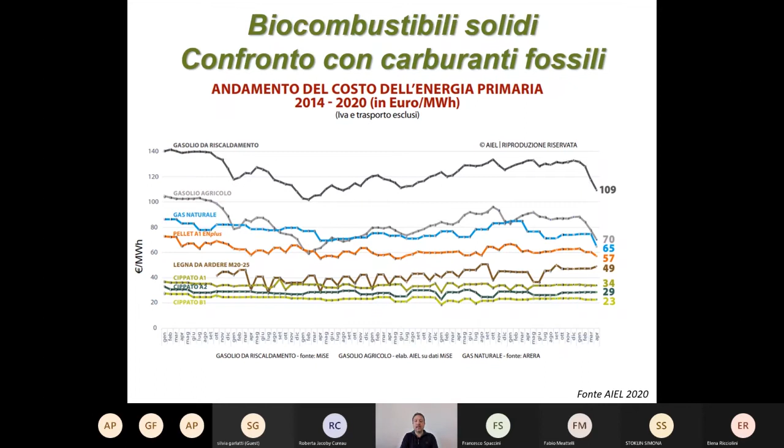And this is the main topic we talk about today. So what are the main characteristics of biomass we need to know to work with biomass. I mean, of course, make research, make also some design activities, for example. So if you work with biomass, you should know some characteristics, chemical and physical characteristics, and this is the topic of the first part of today's lesson.

And we start with a very elementary picture, but it's the easiest way to start to talk about some characteristics. When we talk about biomass, you see a piece of wood, but of course you can think about every kind of biomass we saw in the previous lesson. Every biomass consists of three main parts.

Water. We have water quantity in biomass. It's a very variable element, but present in every kind of biomass, and we need to consider a unit system and something like methodology to evaluate the water content, or we can also call it humidity or moisture. Okay, this is the methodology, and we will see the methodology to measure moisture. So water, and organic matter.

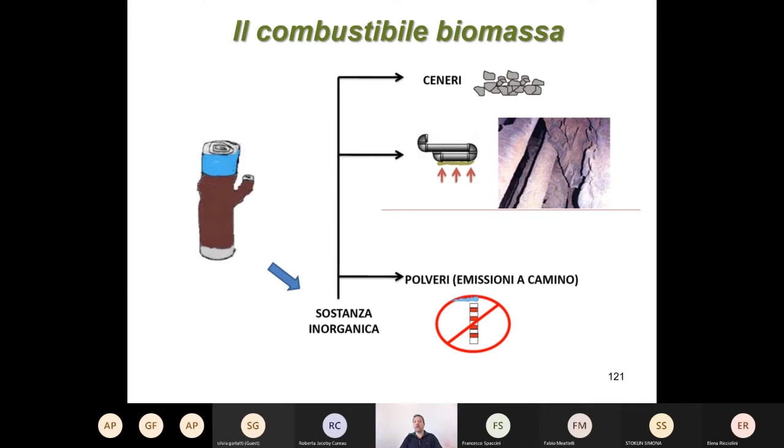Another way to see these three main parts is shown in this picture: water, ashes, and organic fraction. In general, we hope that the main part of biomass is organic fraction, since we need this part for our energy processes, but water could also have a very high percentage in biomass.

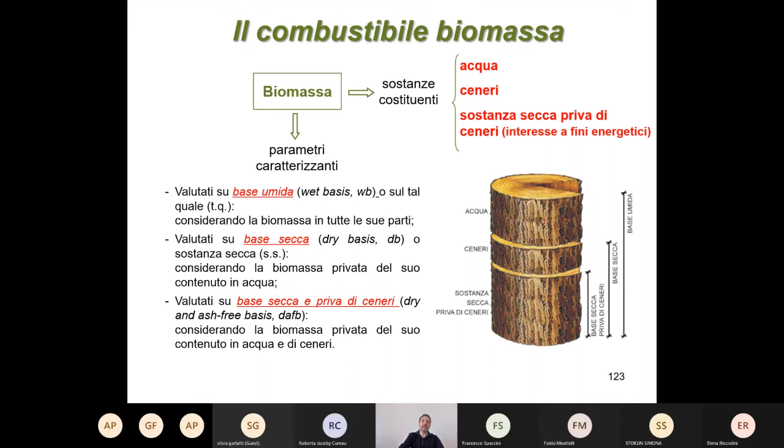Usually this parameter is called the stereo cubic meter. It's a particular unit we use to indicate how much biomass can stay in a cubic meter. For example, in one cubic meter we can have up to 600 kilograms of wood.

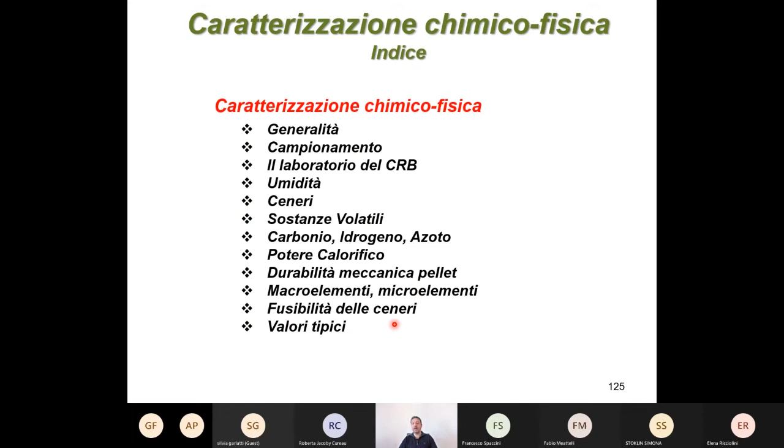These are the analysis machines we have in the CRB laboratory. We have a mill for the preparation of biomass samples. We have a thermogravimetric analyzer to measure moisture, ashes, and volatile matters. We have a calorimeter for measuring heating value, low and high heating value. We have an analyzer for carbon, hydrogen, and nitrogen elements, the pellet durability tester, and several chromatographs, ionic or liquid chromatographs, to analyze the content of chlorine, sulfur, and other elements and compounds interesting for some bioenergy pathways.

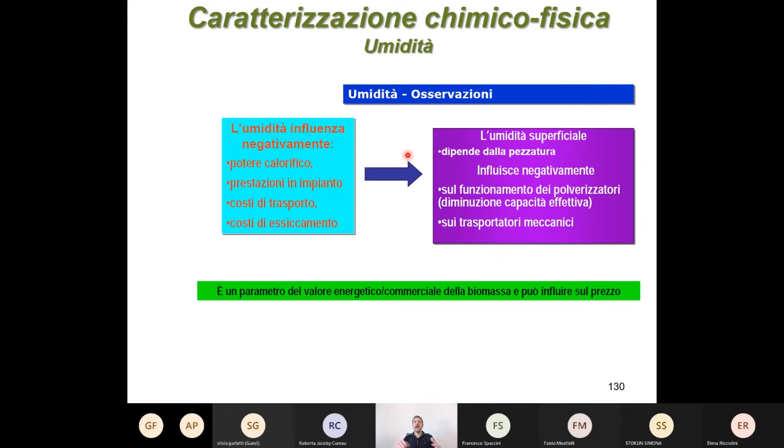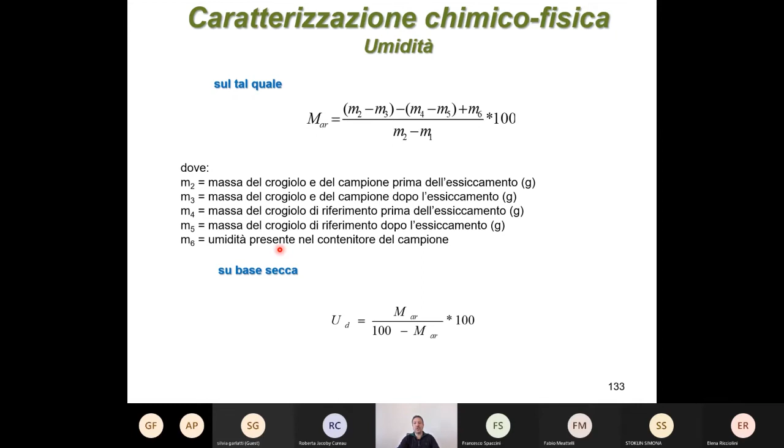I'll go very quickly, so I won't read everything about measuring humidity. Starting from the thermogravimetric analyzer, it's like a balance. We measure the weight, put biomass in with an increase in temperature, and when we're over 100 degrees, for example 105 or 110 degrees, we have water evaporation. We measure the difference in weight and automatically know the water content in the biomass. Then we make a sort of combustion and weigh the biomass after the high temperature combustion. We measure the ashes content, and with the difference we can also define the volatile substance content. I'll jump the equations to know these parameters, but it's a simple process where we use different temperatures to measure the different parts we can define in the system.

Here are some pictures, but of course we can have a closer look during our last lesson, the fourth lesson, which we will have directly in the Biomass Research Center laboratories.

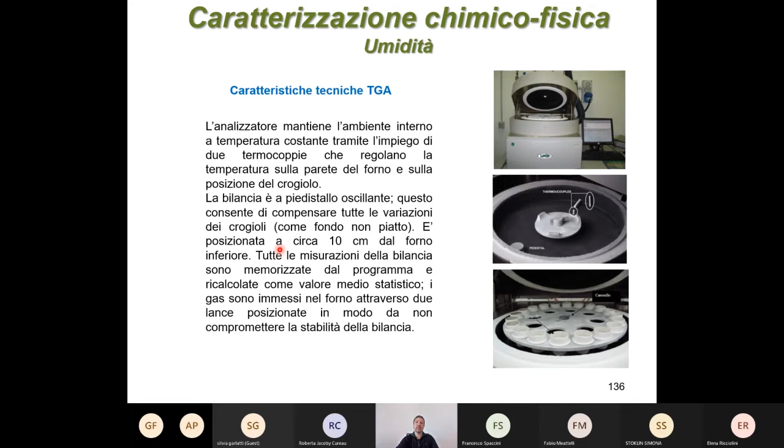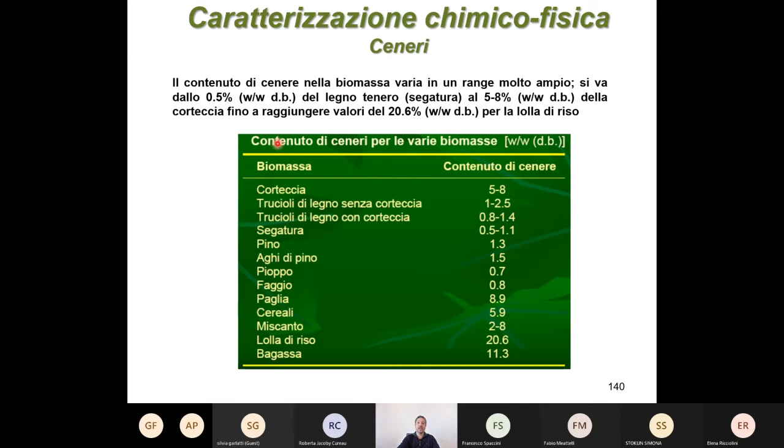I'll go very quickly without deepening into the process you have to do to use this machine, just to show you the result of the analyzer.

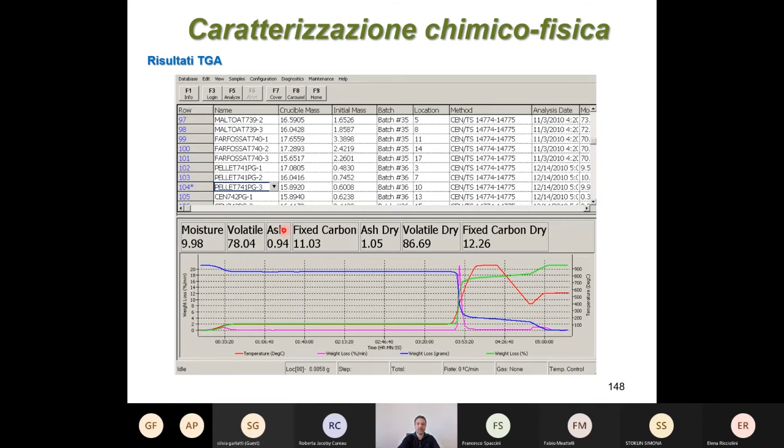Very quickly, another instrument you can use to measure some elements: carbon, hydrogen, and nitrogen. These are the three main elements you find in biomass. So the largest part of biomass consists of carbon, hydrogen, and nitrogen.

Then you can have some oxygen, for example, and of course sulfur, chlorine, and metals, but these are in a very smaller percentage. You have a system that burns the biomass and reads the generated gases from biomass, and so the system evaluates the nitrogen, carbon, and hydrogen content in the biomass.

Another, maybe the most important parameter is the energy content: the high heating value, HHV in English, and the low heating value, LHV in English. These are two ways to evaluate the energy content of biomass, and the difference is connected to moisture.

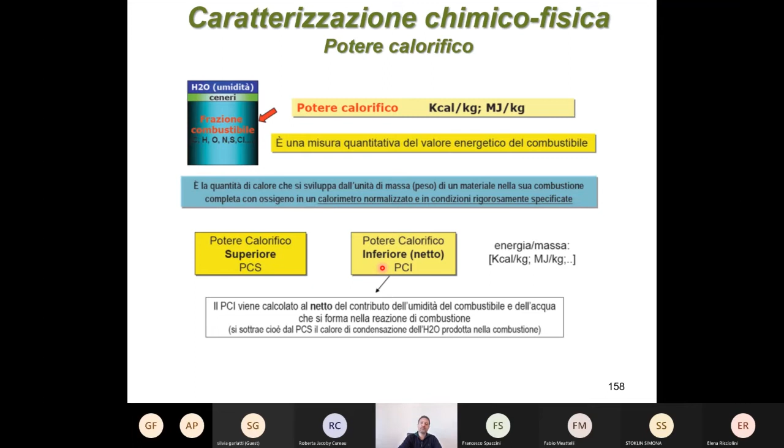We have a system called the Mahler bomb. You put some biomass inside this system, which is full of oxygen, and there is a part where there is some water, covered by a layer of water. Then there is a combustion here when the process starts, so there is something like an explosion. The biomass burns, produces heat, and the water temperature increases. By evaluating this increase of temperature, we can evaluate the energy content of the biomass.

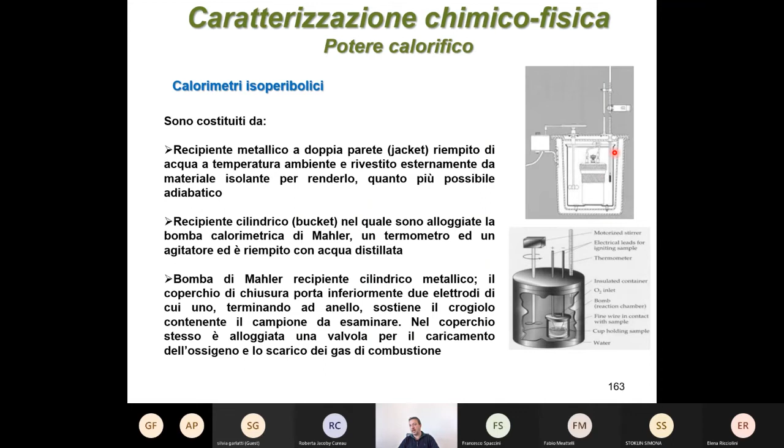So this is one way to see it. Here there is water — this is the bomb, the Mahler bomb, and this is the part where there is water. So when the combustion, the explosion, happens here, this system exchanges heat with the water, which increases its temperature, and the thermometer can evaluate this increase and show you the energy content, following this very simple equation. This is another way to evaluate it, taking into consideration some parameters inside the instrument.

Here is some information about the low heating content of some biofuels and also some fossil fuels. You can see, for example, wood has a low heating value between 2,500 and 4,500 kilocalories per kilogram. You can also find the equivalence with other unit measures — for example, wood has an energy content, low heating value, between 3 and 5 kilowatt hours per kilogram.

Compared to fossil fuels, this energy content is lower. For example, diesel has an energy content of approximately 10,000 kilocalories per kilogram. The same for gasoline. Methane has a low heating value of approximately 8,000 kilocalories per kilogram, or kilocalories per cubic meter in this case.

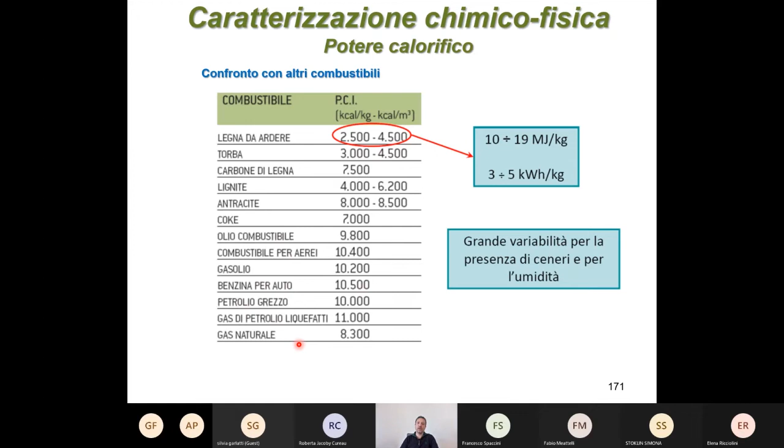For chlorine and sulfur content, we use chromatography. I don't have time to speak about chromatography systems in detail, but just know that it's a very important part of the chemical analysis world, allowing measurement of a very large family of elements and components.

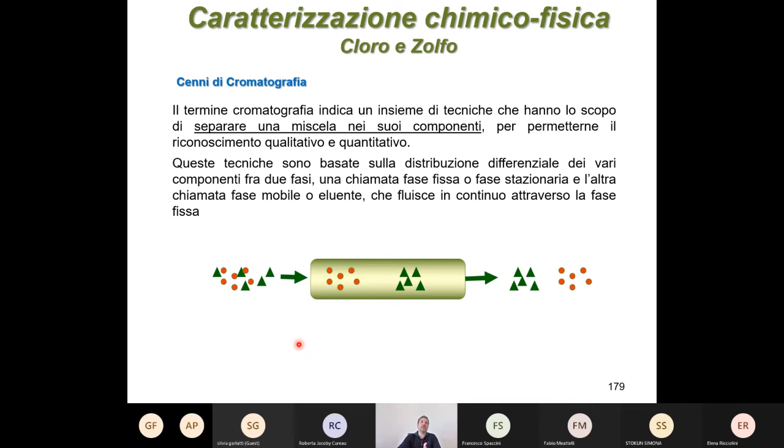We can have liquid chromatography, ionic chromatography, based on columns where the samples move. These columns separate the sample into its main components, and by evaluating the time every component needs to reach the end of the system, you can evaluate what the component is and what its content is in percentage, for example.

So in one minute I talked about chromatography, but of course we don't have time to go deeper. Here is the sense of these analysis systems: if a sample consists of two compounds, two elements, as it moves along the column, these two components have different affinities with the substances inside the column, so they move at different speeds and arrive at the end of the column at different times — and you can see this in the chromatogram.

Also, the pellet durability is another parameter we use to know how much resistance the pellet has to the transport step. It's important because pellets are small cylinders where sawdust is pressed, and when you move the pellet during transport, it can break down again into sawdust, which is not useful for your boiler or fireplace. So durability says how much of the pellet remains in good composition. For example, 97% means that 3% could be lost because it turns back into sawdust.

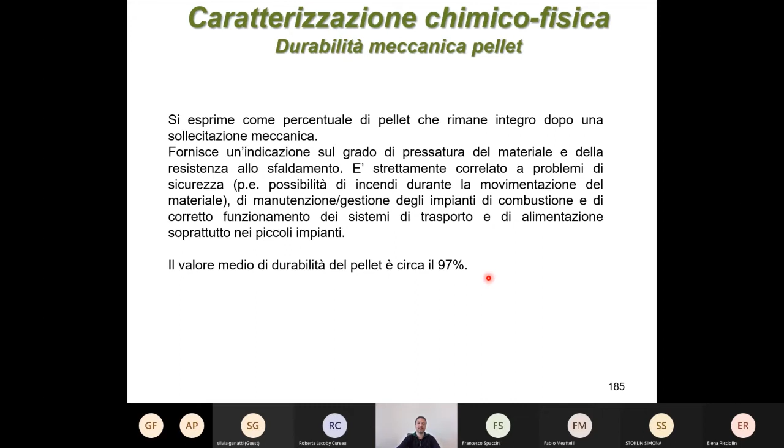I complete this topic, the chemical-physical characterization, by having a look at two very different biomasses, just to appreciate how much these parameters can change in a biomass compared to another.

For example, we will compare wine prunings, some lignocellulosic biomass from the pruning of viticulture for wine production, and here you can see a picture, and we will compare it with pellet obtained from sawdust from forestry maintenance. These are different biomasses, but not so different, because you should mind that we can also have manures, for example, or very liquid biomass like vegetable oil. So we are comparing two different biomasses, but not so different, and you can see how much some parameters change.

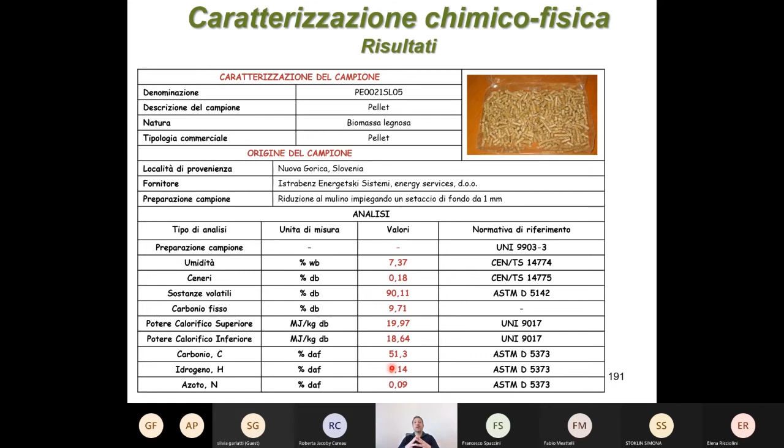And why do we have to know these parameters? Because, and this is probably the most important slide we will talk about, it's so important to know the composition of biomass because this composition gives me the information I need to make a choice of what process I can perform with this kind of biomass. And so this brings me to introduce the next topic of this lecture, which is bioenergy conversion processes. We talked about biomass typologies, we talked about how to transform biomass into biofuel.

Now we can talk about how, from a biomass, from a biofuel, I can move through a process toward a final bioproduct. And this final bioproduct could be energy, of course, which is a very important part of this world. Through a particular process, I can produce energy, electricity, heat, and cool energy. But also I can produce, for example, biofuels, biodiesel, biomethane, bioethanol in substitution of gasoline, biohydrogen, which is a quite new energy vector we are exploring in research and also in some development systems, or for example bioplastics, biolubricant, and so on. I can continue all morning showing you final bioproducts you can obtain.

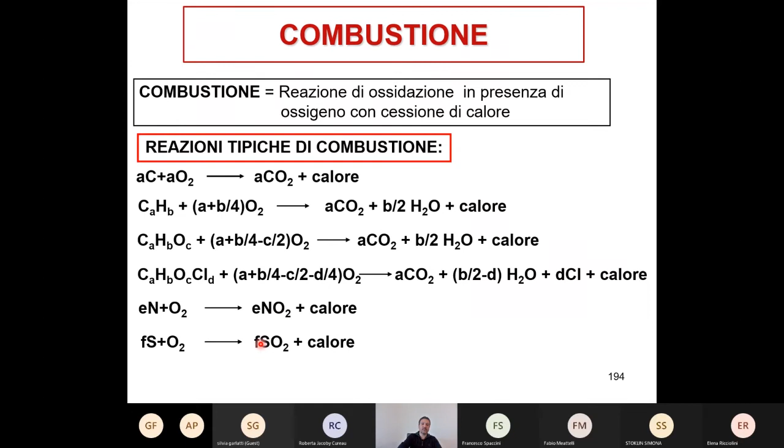Another important thing you should know when you talk about biomass combustion is that, comparing to methane, we have a biofuel with a volume. Think about wood, for example, or pellet or chips. We have a biofuel with a volume, so in general we have three phases during biomass combustion.

A first drying phase where we are at more than 100 degrees, and water inside the biomass starts to evaporate. This is the first part. We have a second part, which is a sort of pyrolysis. We are talking about combustion, but we have a sort of pyrolysis, because when the temperatures become very, very high, 300, 400, 500 degrees, we have this situation where inside the biomass we have very high temperature, but there is no oxygen, because oxygen is around the biomass.

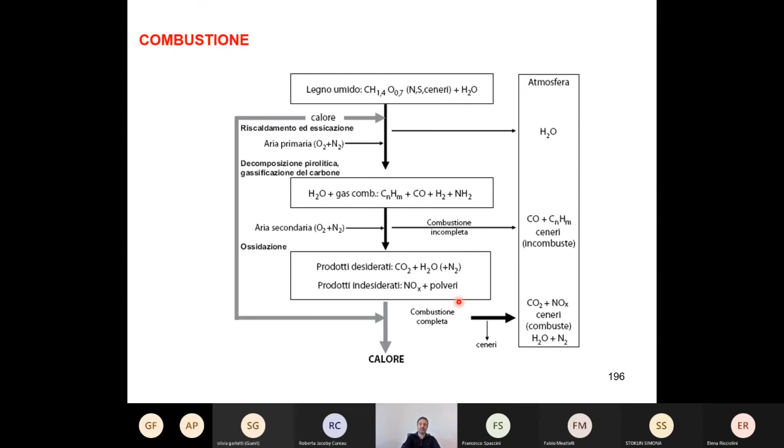Okay, now as usual I move towards interesting combustion systems. So how can we use these combustion processes? What is the combustion system we can use? Let's see, I'll go quickly.

Okay, sorry, just a stop to what I was saying, to have a look at the biofuels. I don't know if I showed you this picture, but just to understand what we are speaking about: this is pellet, small cylinders. These are wood chips, small pieces of wood which have a low energy content, but also a very low cost, because you can obtain them from, for example, agricultural or forestry residues. Briquettes are not so commonly used as biofuels, and of course wood, but wood is just for our houses.

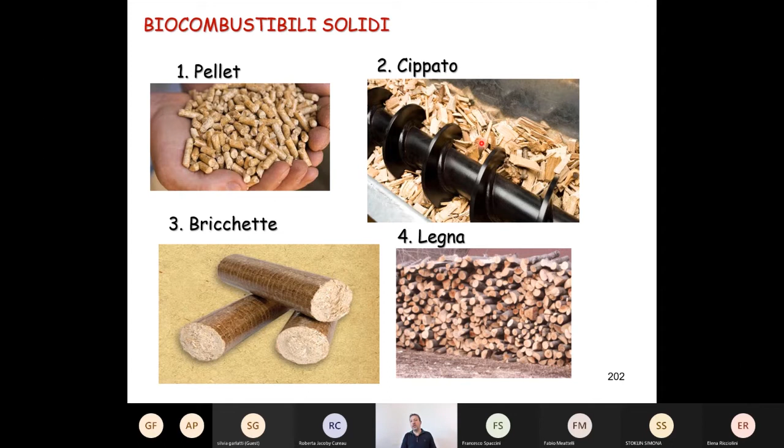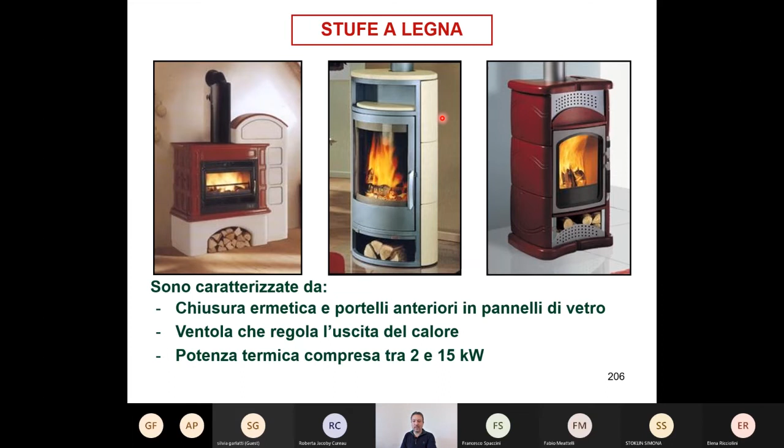There is no industrial use of wood. When we talk about industrial use of bioenergy, we talk in general only about wood chips. And so, biomass energy conversion systems start from your fireplace, the simplest system for producing energy from biomass. But of course, we quickly move towards more interesting biomass systems. You can also see some other kinds of stoves, wood stoves, pellet stoves, and now we can move to boiler systems, biomass systems that produce heat for our heating distribution system.

In general, the boiler produces heat that is exchanged with water, and so you obtain hot water that is used, for example, in your terminals to produce heat for your rooms, also for your shower, and so on.

Here you can see another typical way of biomass combustion. In general, you have a first combustion where you have the combustion of wood, and then a secondary combustion here where gases produced from the first combustion are burnt, because in the process you also produce some gaseous biofuels, and you have to burn them to maximize the energy production.

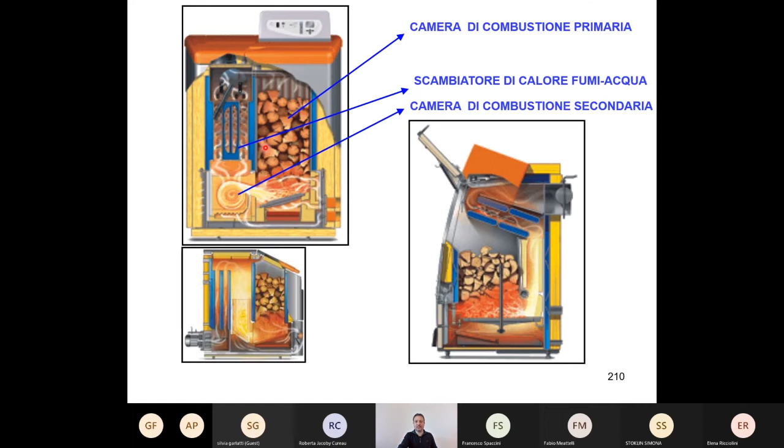Just very quickly to zoom only to important information. These pictures let me speak about another topic we just introduced. One of the main differences between, for example, methane boilers and biomass boilers is the store system. We just introduced this theme.

You usually don't have to think about the gas the boiler needs, because you have a pipeline that is connected to your methane boiler, and if Russia doesn't close the pipe, we should have all the gas available into our boiler.

If you have a biomass boiler, you also have to think about the biomass supply to the boiler, and also the biomass store for the boiler. Otherwise, you have to stay all day to charge the biomass.

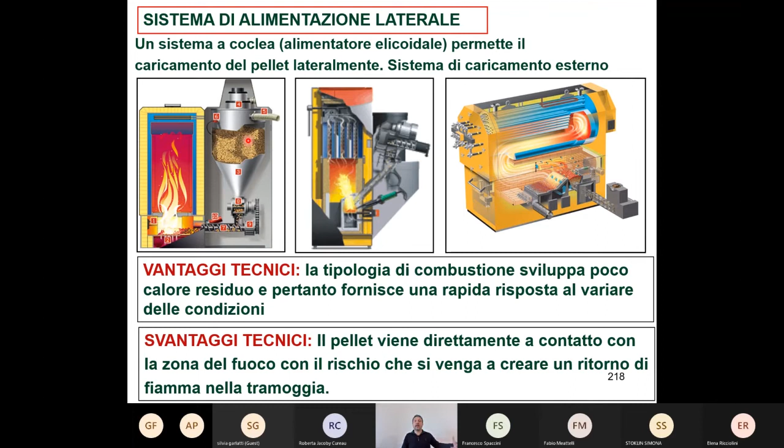So if you want to use a wood chips boiler, you need a very large store, and so it's not convenient in small houses. We're talking about big houses where this kind of space for the boiler and also for the store is available.

So we have the possibility to have an automatic system, but of course you have to supply this store every 2 months, 3 months, or every year. It depends on the size, on the dimension of the store.

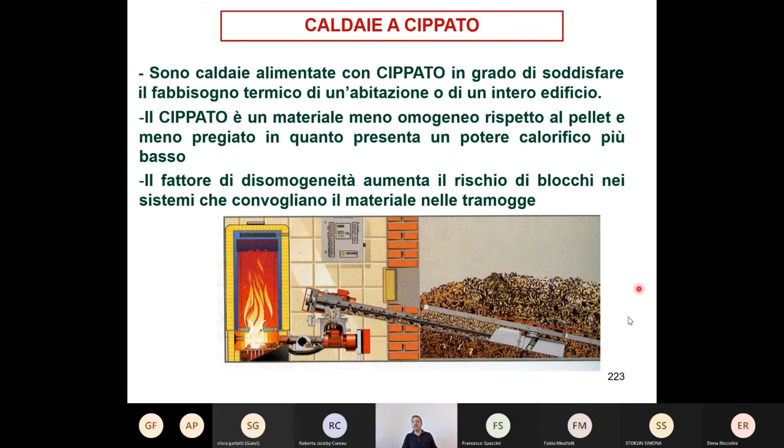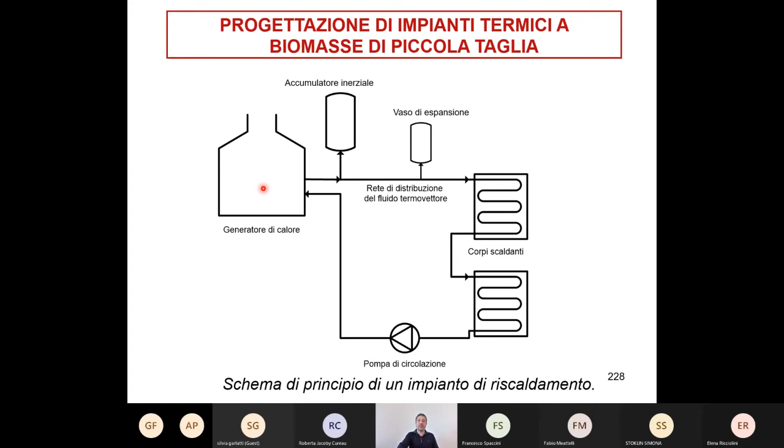Yes, I go very quickly just to see some pictures about wood stores, or for example, in general, if I have more time.

In the course we make also some examples of the designing, the evaluation of the volume of a store for pellet, for wood chips, and so on.

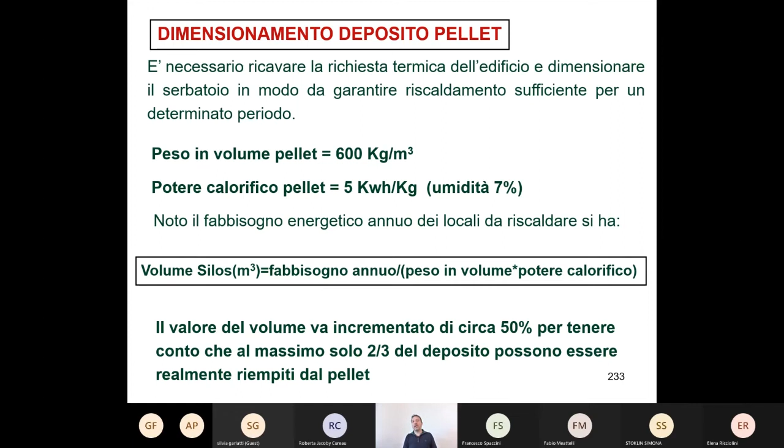But of course we don't have time now, because otherwise we have to stop the course with these exercises. So I go very quickly here.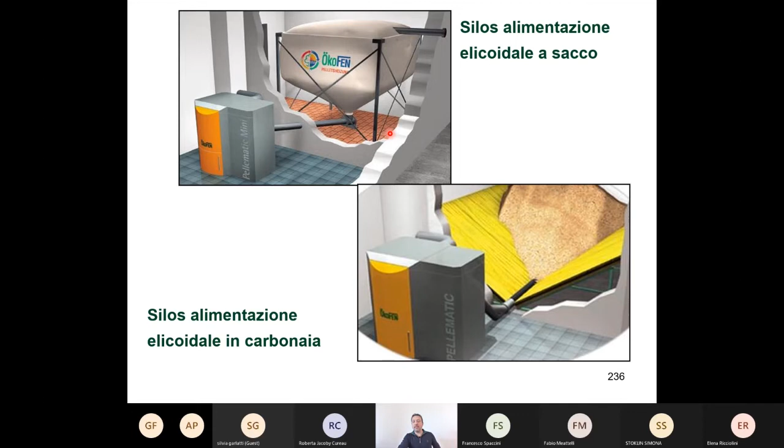Some moving systems. We can use also some bags for pellet store. Of course, some stores for wood chips too.

A lot of possibility. Of course, you can have a specific building in this case for the energy system. So we are not speaking about your or my house.

But if we speak about a very important house, or for example other users like industrial areas or commercial areas, or a hospital, for example, so a very large building, we can think about this.

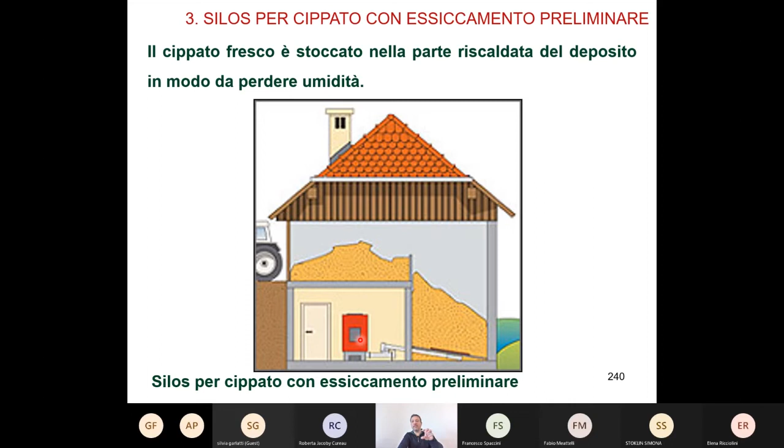This building for the boiler and for the store, so a lot of possibilities. This is the easier part, because you can create a store.

Underground, and also use the underground of your building, and you can easily charge the store, and you don't need so much space.

To have these systems working. Okay. Or another possibility is this one, a container.

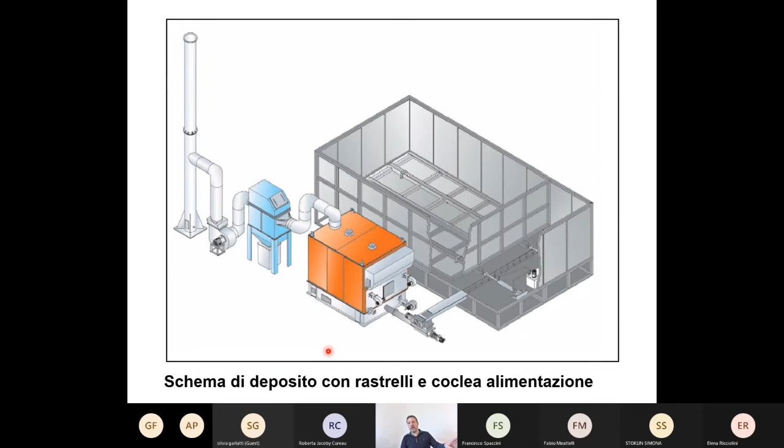There are many possibilities. Of course, as I said, we are moving towards bigger plants. Here some storing and moving systems.

I just told you about the coclea, to move wood chips and to charge it into a boiler. Some kinds of other systems to move the biomass inside a store, a conveyor belt, for example, or some racks.

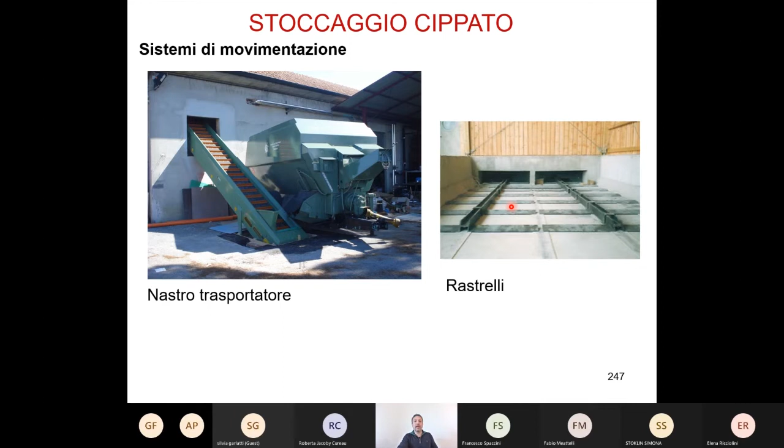Moving racks. Okay, other kinds of moving systems to move biomass. And of course we have reached very big sizes.

Here then there is an automatized store for the systems, and of course the production of very large quantities of heat.

The combustion phases are the same: drying, pyrolysis, and oxidation and combustion, both in your fireplace and in a big plant.

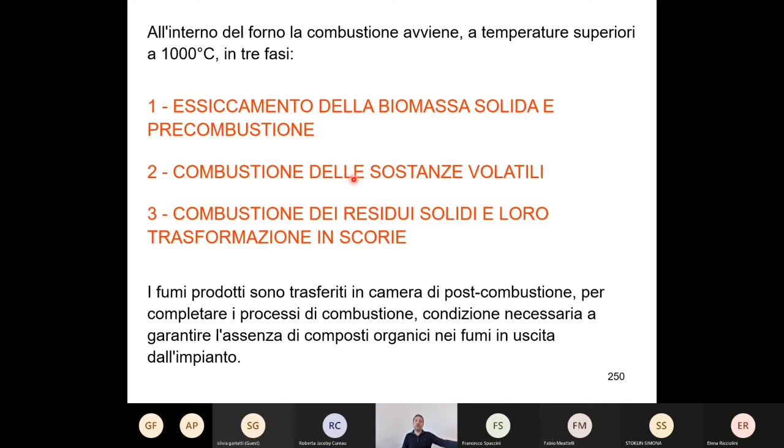Okay. Yes, these are other possibilities for these big plants, with a moving grate, with a particular system.

Other pictures of boilers with the heat exchanger to transfer heat from exhausted gas to water, for example.

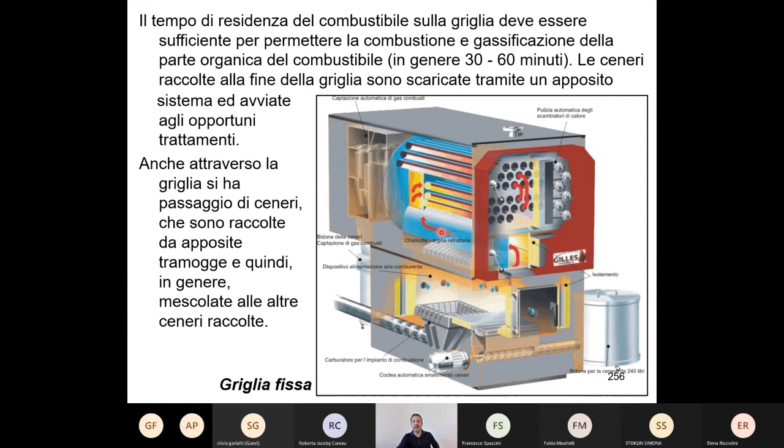So a lot of technological systems to use biomass in these energy production systems.

Okay, I go very quickly to this other very important concept.

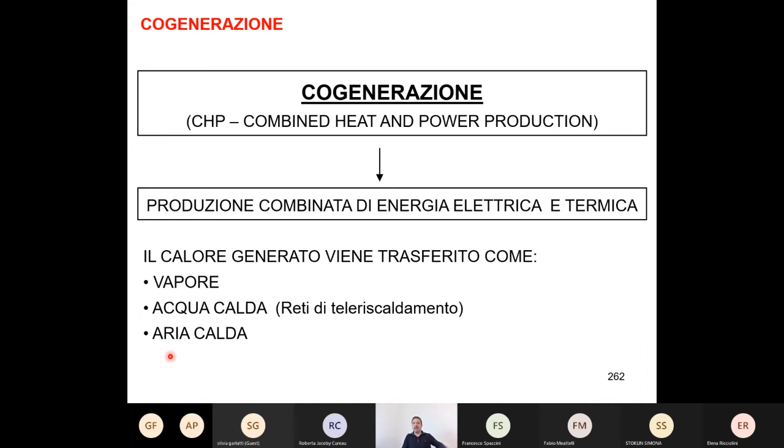We are speaking about very large plants, up to district heating. So the distribution of heat into towns, into industrial areas, into commercial areas. So we are talking about district heating, teleriscaldamento.

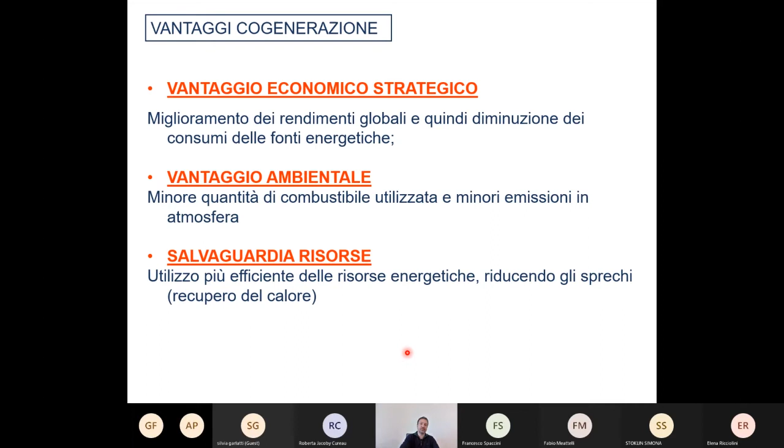We also have to consider the weakness of cogeneration. You can use combined heat and electricity production only if you have the possibility to use it in the neighboring area. Electricity could be used very far from the production point, because we have a distribution grid that covers all over the world, but you don't have the possibility to transport heat in a long way. So there is local availability for its use. This is a weakness, but it's not a weakness if you realize this kind of plant near heat and cool users.

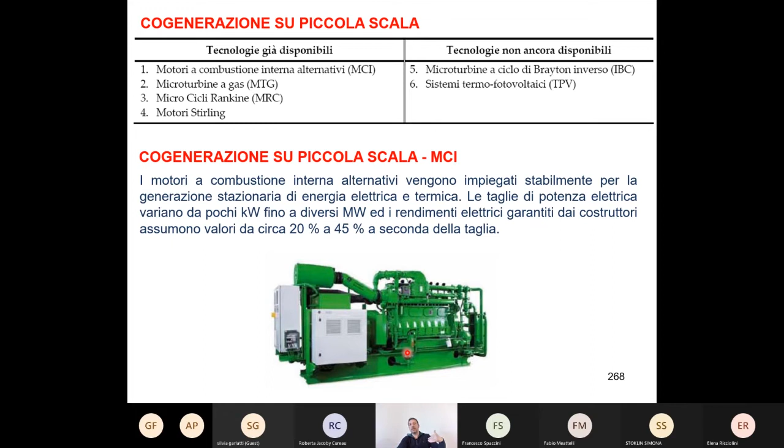I will not speak in detail about engines, turbines, Rankine cycle, diesel or gasoline cycle, because you should already have this information from your university studies. Just to show you where the combustion process, also for biomass, can reach: we can use turbines, diesel engines fed by biodiesel, gas turbines fed by biomethane. So combustion can reach a lot of potential applications. Cogeneration can also be used at small size, for local buildings or local areas.

The progress of technology allows us to decrease the size of these cogeneration systems. Some information about these systems.

Just a mention of the organic Rankine cycle, which is a particular system used quite often also in biomass systems. It's quite different from the traditional Rankine cycle. In the traditional Rankine cycle, the thermofluidodynamic fluid is water - you studied a Rankine cycle with water and its evaporation to produce energy. The organic Rankine cycle uses an organic fluid instead, so it's different. The system is the same, because we have an evaporator, a generator, a condenser, and a turbine, but the fluid changes, and so the temperature, pressure, and other parameters change. I don't want to go too deep into this, but just to note this.

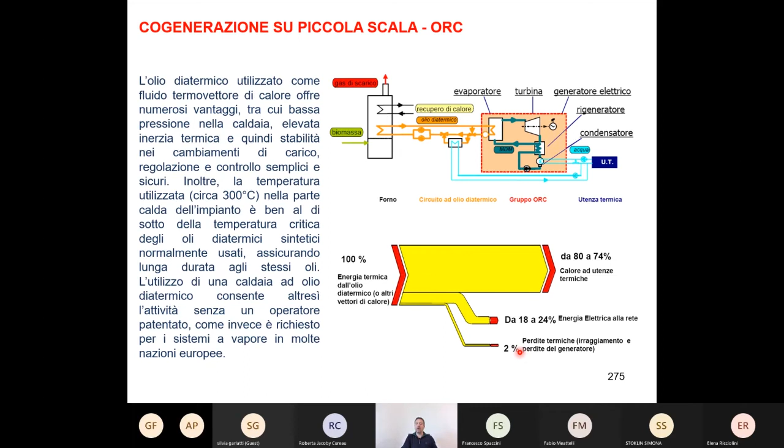It can also be used to produce cool water for cooling systems, so you can use it in summer too. District heating can also be used in summer for cooling system supply, and so the energy recovery is much higher, because you recover heat not only in winter or autumn, but also in summer.

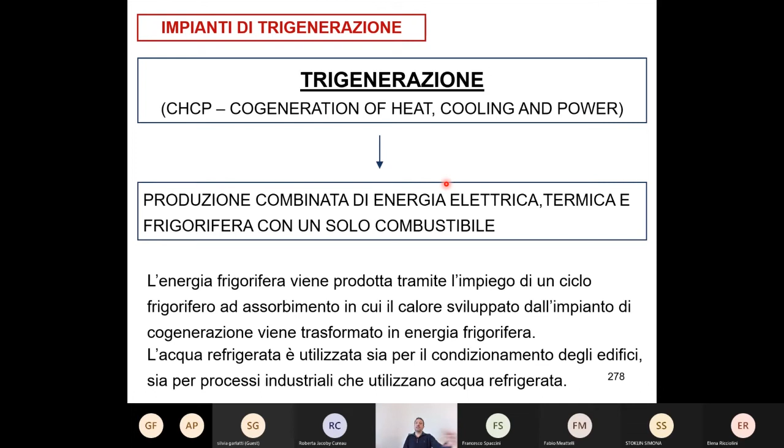And here some information about district heating.

Okay, so is it possible to make some questions? Of course, sorry, I didn't ask if anyone has a question. Of course, please, thank you so much. Could we go to page number 192? Of course. My very, very short presentation. Okay, so.

I wonder which of the technologies you showed in this slide is the most mature, and if there are existing plants currently being used. Sorry, what is the technology that is more mature?

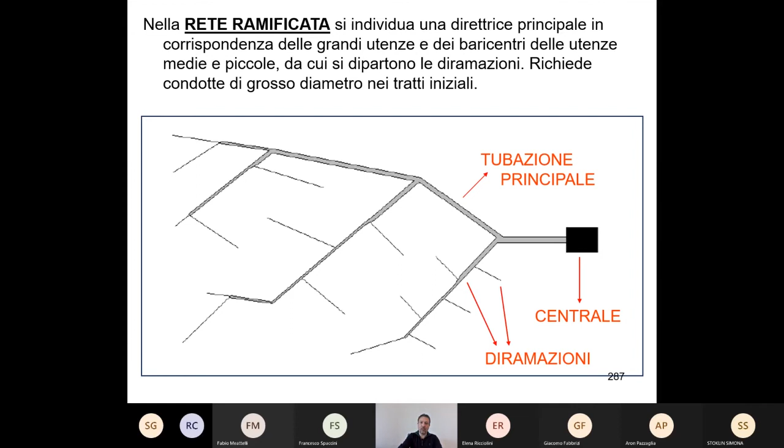So now you should see the presentation, just to show you district heating, where you have only one energy production system that produces electricity in general, and also heat, and a distribution system. Here you can see the single buildings reached with hot water, and this hot water will also be used in summer for cooling buildings. There are several possibilities for district heating, but just to know: the pipeline, which can run along 5 or 10 kilometers, must have very, very good insulation. Otherwise, if you start with 90 degrees centigrade, you reach the last user with 20 degrees centigrade, and it's not useful for heating. So you have to use very performant pipes with very big insulation systems.

And this is the pipeline you have to create to reach the single buildings. Of course, then you have to connect with the building, which in general is an existing building. So you have to reach the building and connect to the local heating system. This is a very important part, and not every house or building has the possibility to connect with district heating. So you have to design this part with great attention.

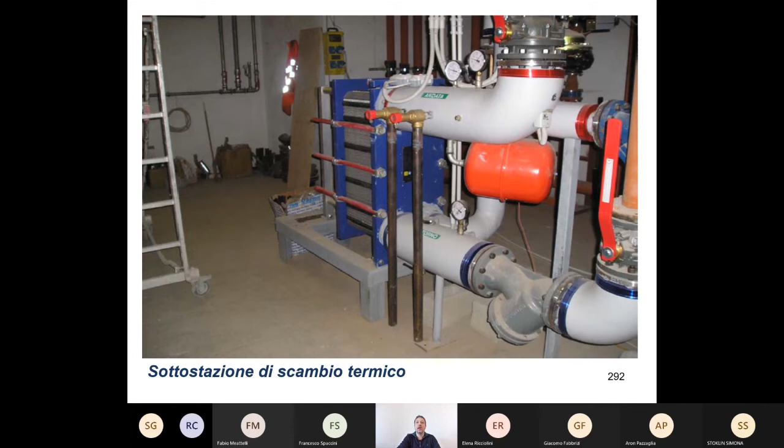Okay, a very quick zoom into gasification, just to say something more. So gasification is a sort of combustion, but with less oxygen than the stoichiometric amount needed. Small combustion needs to give the system the energy it needs, while gasification is the transformation of biomass into a syngas, into a gas. What does this syngas consist of? The main components are carbon monoxide, which is a gaseous fuel because carbon monoxide can burn to produce energy, as well as methane and hydrogen. So these are the main components of syngas, and that's the gasification goal: to obtain a gas useful in other energy conversion systems. So this is the difference from direct combustion.

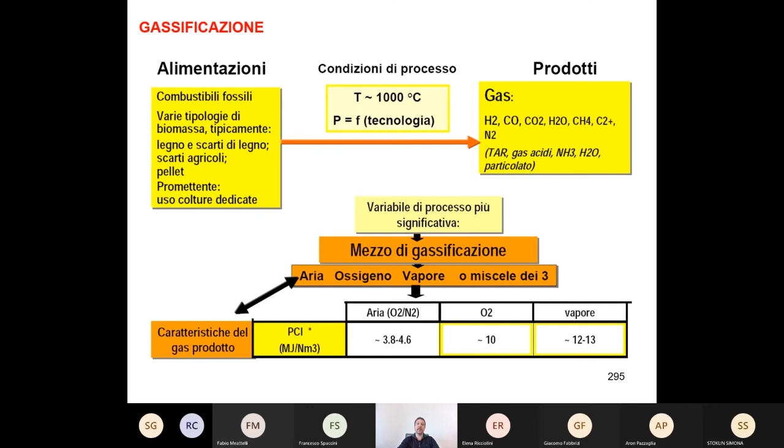The process needs some heat. This is the reason you use a part of the biomass to produce flames, to produce combustion and give energy to the process. You can use air directly, or you can use air to reach a certain oxygen percentage, or you can use directly oxygen without air, without nitrogen, only oxygen.

You can also use steam, and of course the low heating value of syngas increases. Using air, you have a syngas with a lot of nitrogen, which doesn't participate in any energy process. So you have half of the syngas as nitrogen without energy content, so the energy content is quite low. If you use oxygen or steam, you have very low presence of nitrogen, and so the low heating value increases, double compared to the air one.

So it's a difference, but of course air is not a cost, while oxygen is a cost to the system, so you have to evaluate if it's economically feasible to use oxygen.

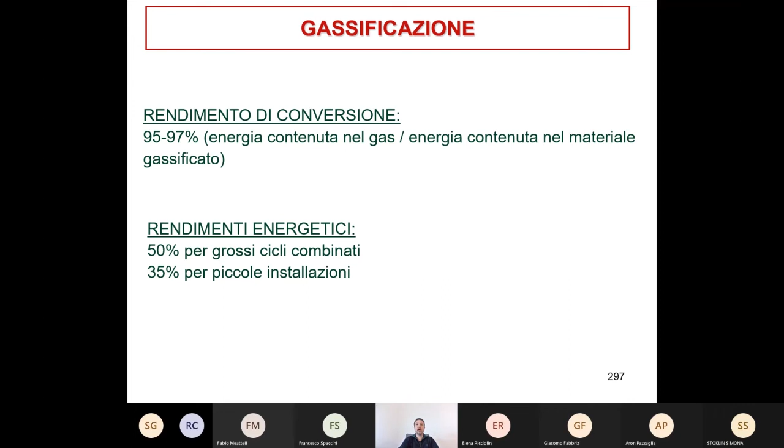As I said, I don't treat the typologies of gasificators because it's too heavy and it's not convenient to stop here. I just give you an input about the syngas treatment.

Syngas is a very complex mix of components. You need to use only the components that participate in the following combustion, so you have to eliminate the pollutants too, particularly some metals, nitrogen, tars - which is a liquid fraction that can move together with the syngas - sulfur, chlorine, and so on. There are a lot of treatment systems to obtain a pure syngas with only the components you need for combustion.

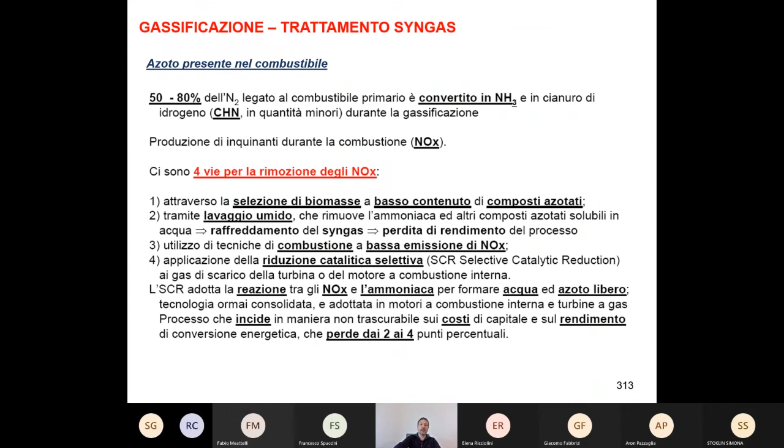You have biomass subjected to a range of temperatures, from 400 degrees centigrade to 800 degrees centigrade, without any oxygen - so in an atmosphere with 0% oxygen. With these conditions, you can transform biomass, with this high temperature, into three elements: a solid biofuel, the char; a liquid biofuel, the tar; and a gaseous biofuel, which you can call syngas or pyrogas, to distinguish it from gasification technologies.

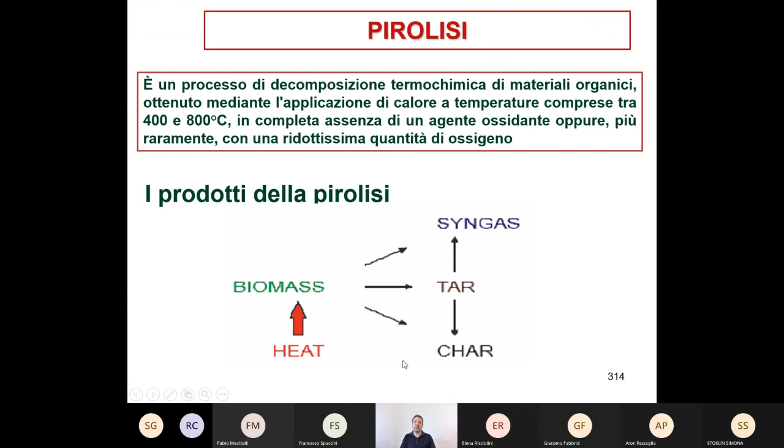To complete this part: the low heating value, which is very variable in pyrogas, from 10 to 25 megajoules per kilogram. So its content is probably higher than syngas obtained from gasification. And of course, we don't have nitrogen in the pyrogas, so the energy content increases.

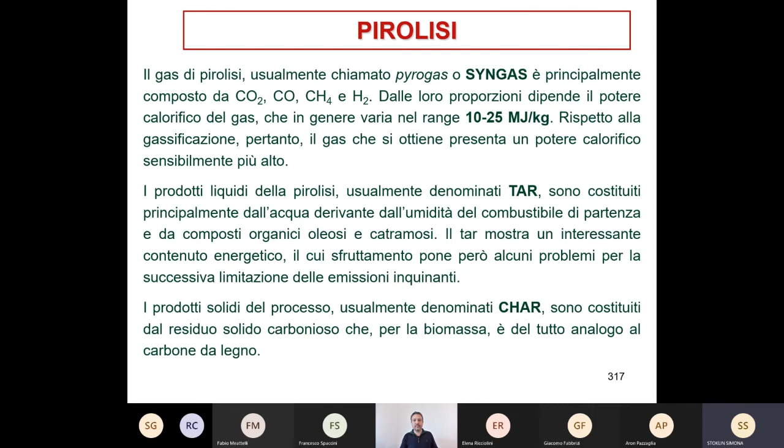As with gasification, I won't show you the pyrolyzer or pyrolysis systems. Just a final look at the emissions of thermochemical processes, another important topic you must consider when entering the bioenergy and bioproducts pathways.

When you work with thermochemical processes, you have emissions mainly in the gaseous fraction, in the exhausted gases, but also for example in the ashes, the solid residue. Comparing biomass processes with fossil fuel processes, you have these families of pollutants: nitrogen oxides, sulfur oxides, particulate matter (PM) in the exhausted gas, and VOCs, volatile organic compounds, which are very dangerous for human health.

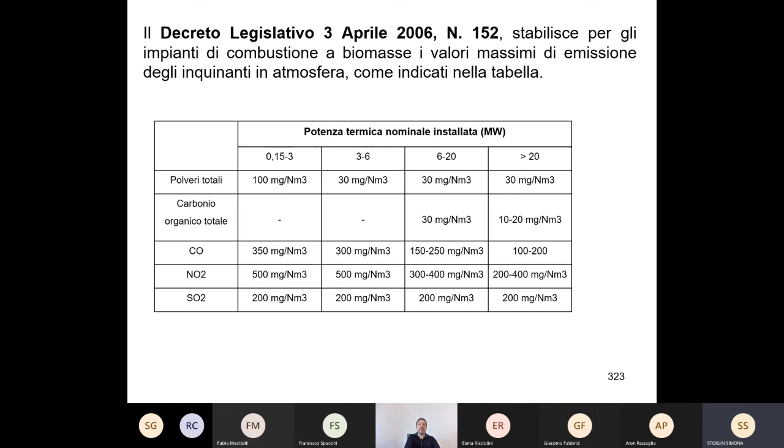I'll go directly to pictures to show how district heating is developed in Italy, not only district heating from methane or fossil fuels, but also district heating from biomass is present in Italy. I don't want to say it has large diffusion because that's not true, but there are many examples of district heating from biomass, from renewable energy.

Also near Perugia there are some district heating systems, but those are fossil fuel district heating, and maybe they aren't working anymore—I know the company had economic problems, so they're not operating. But near Perugia there were 5 or 6 district heating plants in the neighboring areas, close to San Mariano, which is very close to our university.

Moving quickly to wood chip district heating: there are plants not only in the north of Italy near the Alps, where there's a large distribution of these plants, but also for example in Tuscany. In Tuscany we have 3 district heating systems, near the mountains, where there's availability of biomass from forestry, and also difficulty for the traditional methane network to reach very isolated towns or villages.

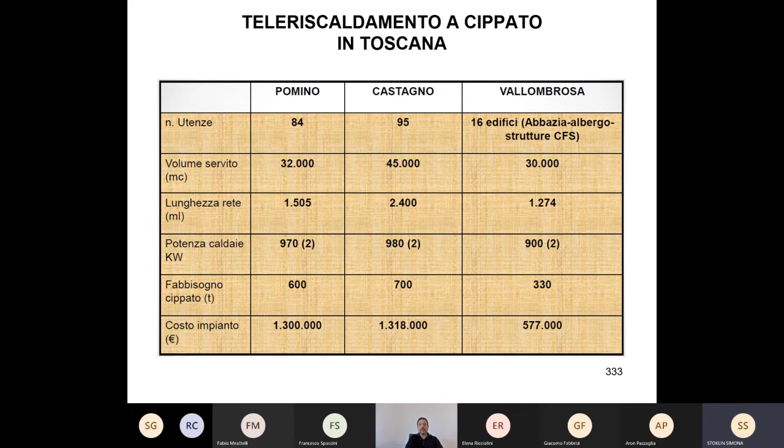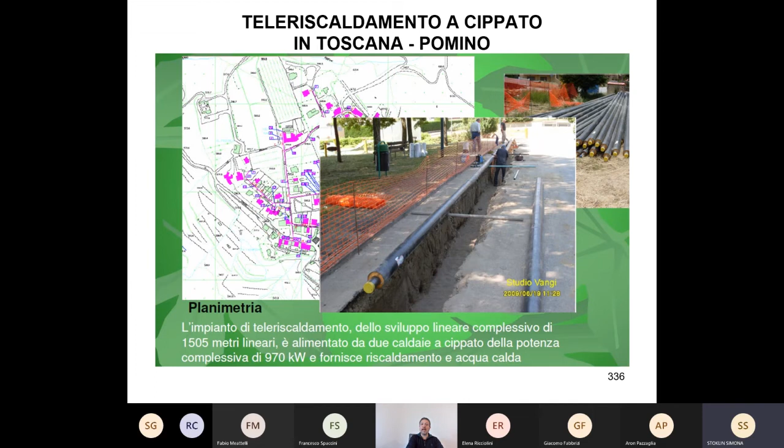The connection between the existing plants is another important element I underlined, and of course there is a lot of biomass district heating in the north of Italy, in Trentino, for example.

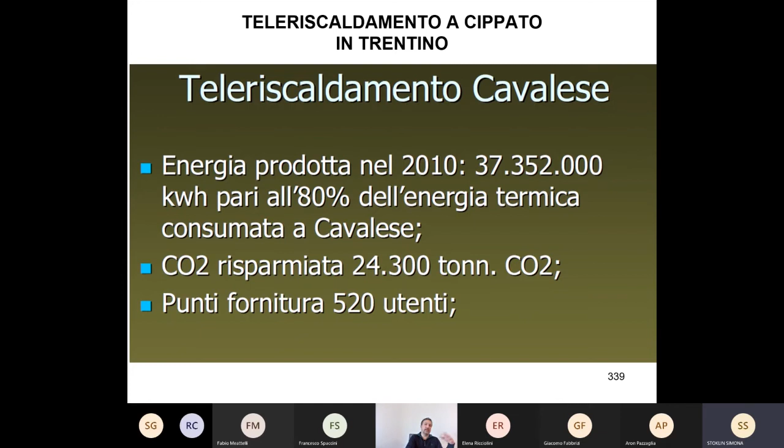Here you can see also there is a very large size of these plants. Here you can see the wood chips stored open, and then a fraction of this biomass is moved to the biomass systems.

The overview is the same. You can see the boiler systems, the pipeline that reaches also very far away buildings, and of course the combustion process.

In 2012, this municipality received recognition to be 100% renewable, and so they use district heating and also wood for local, single-use heating.

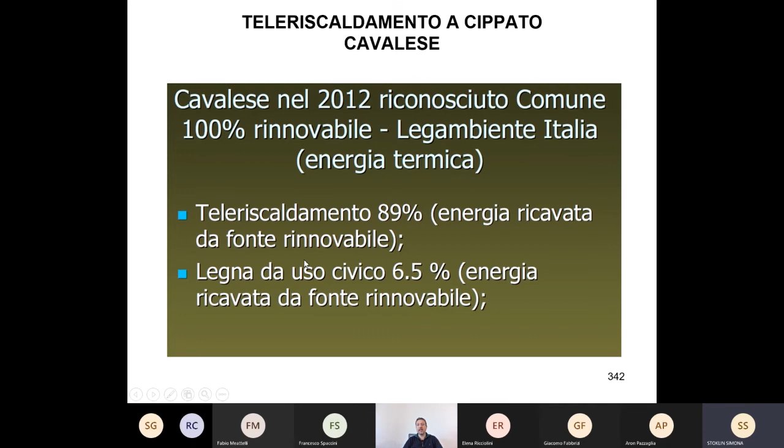I see, but there is a bad connection. Can you hear me? And could you see the percentage? Okay, yes. I sometimes receive messages that there is low quality of the network, so I ask you.

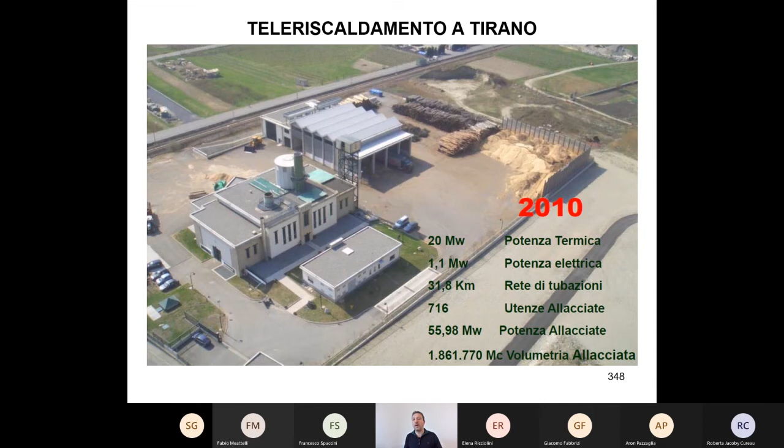Other pictures of the pipeline, the realization. It's not so easy to create a district heating system in an existing town, because you have to distribute the pipeline along streets and through the quarters of the city. Of course, if you have a new town or a new quarter, you can design the district heating and realize the pipeline together with, for example, water or electricity lines, or the other lines you need in every city.

These are also some pictures of the characteristics of the distribution system. This is, for example, the district heating: you start here from 76 degrees and come back at 30 degrees. So you transfer heat to the user, who, for example, uses it to produce heat, or for shower or other uses of water.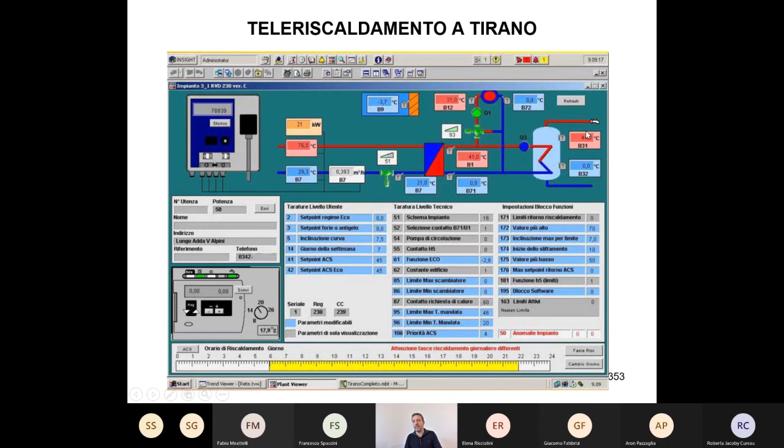I don't have time to read everything, but of course district heating also means economic savings, because the costs are lower than traditional heating systems.

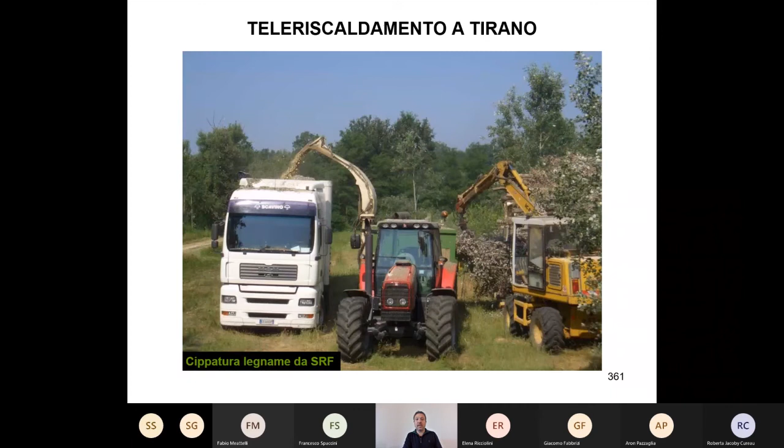In the very last part of this lesson, I will speak about only one of the biological or biochemical processes. We now move to the second family of energy processes, biological processes, and we will speak about anaerobic digestion. I will speak about fermentation in the next lesson, when we talk about biofuel production, because fermentation is a typical process not for direct energy production, but for biofuel production, in particular bioethanol, for example, but not only, because also biodiesel could be produced in a particular way, or biohydrogen, for example. So today we speak about anaerobic digestion, and in the next lesson, when we speak about biofuels, we will speak about fermentation.

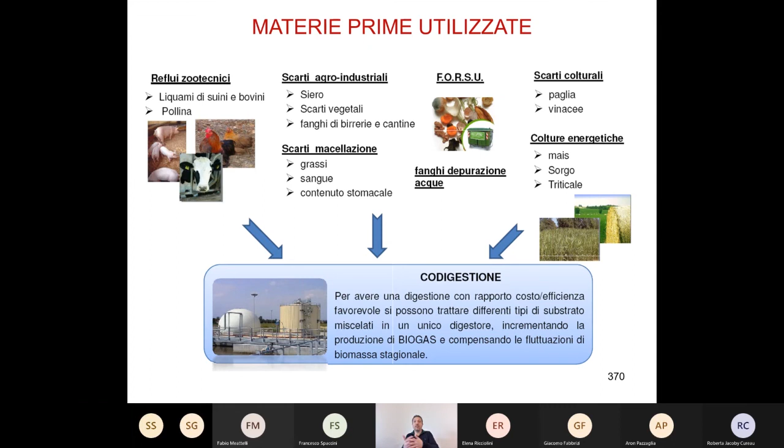So we have to use a food crop for energy purposes, we have to use agricultural lands for energy purposes. So it's a very interesting biomass, but with a lot of environmental problems. You can see it's the same cultivar as food agriculture, and so there is this competition that makes this biomass not sustainable for energy purposes. So you can use them, but they are not as sustainable as residues, like manure, like wastes.

Manure is interesting because, in a circular economy way, you reuse these wastes, but you can see that they have a very low biogas potential. Of course, the cow or the pig eats this plant and uses it for its purposes, and the residue of this cow, of this pig, has a low biogas potential. So this is the reason you can see this great difference.

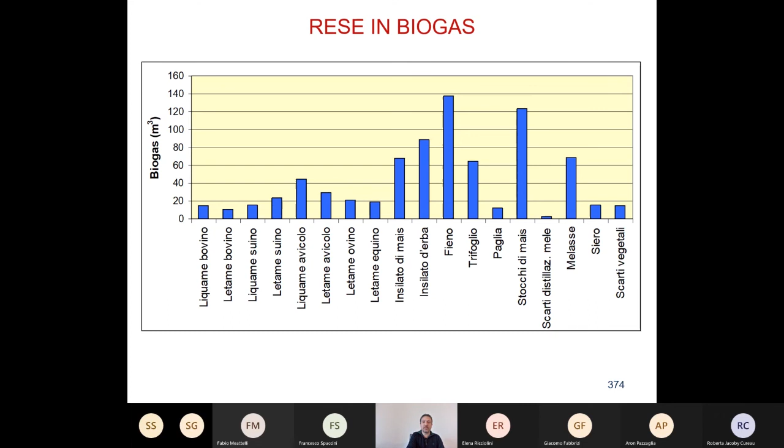Don't have time to show you the costs. This is a way to maintain biomass - I don't know the English translation of insilato di mais, but it's a way to maintain the biomass for all the year. When you collect maize or other cereals, you collect them into a precise period of the year, and then you have to use that biomass all over the year. So the insilamento is a way to avoid that the biomass, which is a fresh material, is not good because it could have some problems.

Okay, and here you can see in detail the anaerobic digestion process. So this is the picture we have just seen. Water is not used for microorganisms, the ashes are not used, and the organic fraction in part is converted to biogas. How does this process happen? Here you can see the several steps you have during the process. You start from biomass that in general consists of three main parts: proteins, carbohydrates, and lipids. You have these three big families.

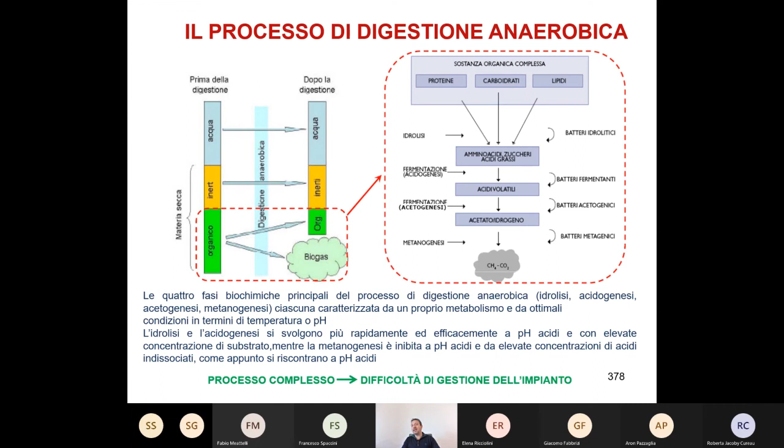Okay, it's another way to see the process. Here you can have the description, probably a more detailed description, just to see the final reaction. So this is acetic acid, and the final family of bacteria use this acetic acid and produce methane and CO2. Of course, it's not only this one reaction - we have a lot of reactions inside the process, but the main reaction and the most considered reaction is this one. Of course, we can also have other families of bacteria in competition that can produce other components. So it's more complicated than my description, but this is the considered pathway we have in the process.

And this is the final composition of biogas. So you have a quantity of methane, which is the most considered component, that usually is between 50 and 80%, and in the composition of anaerobic digestion, the composition of CO2 is from 50 to 20, depending on the quantity of methane. Then there are a lot of other components, but in very low percentage.

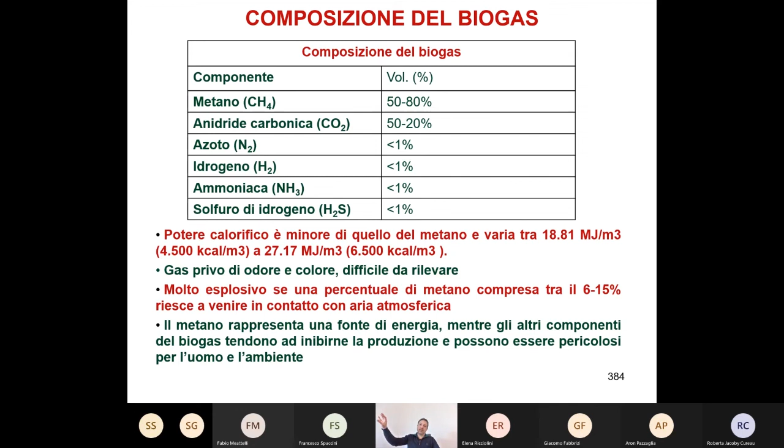Just to introduce other parameters for the anaerobic digestion process. For example, you can consider the process temperature. You can work with temperature lower than 20 degrees, or between 20 and 40, or maybe higher temperature.

Of course, you have to change the bacteria family that works in your digester, because at each temperature level you have a certain kind of bacteria. If you work at higher temperatures, you need other families of bacteria, and in general we work quite heavily with this range, with mesophilic bacteria.

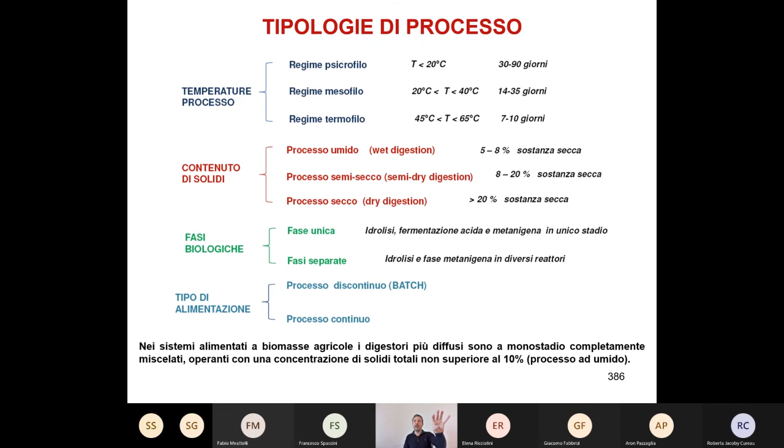So, for example, the typical duration of the anaerobic digestion process is 28 days, 4 weeks.

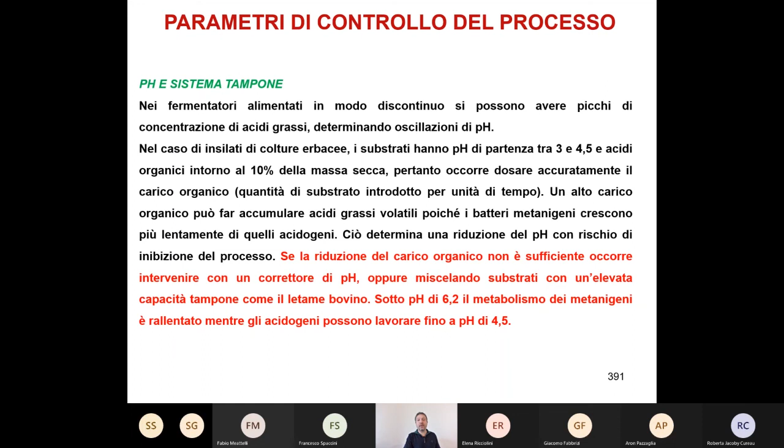Typical temperatures are between 30 and 35 degrees, which means that for a large part of the year you must heat the digester — in winter, in autumn, also in spring during the night. So there is a large quantity of heat you have to use for the process, and the other part you can use for heating or other purposes.

There is a non-degradable part for bacteria, for example cellulose or other components, and so you can recover this residue. Part of it could follow aerobic digestion, as I mentioned before, to produce compost or fertilizer, and also the liquid part rich in nitrogen could be used for fertilizers. So you can use all the residues to come back to the field.

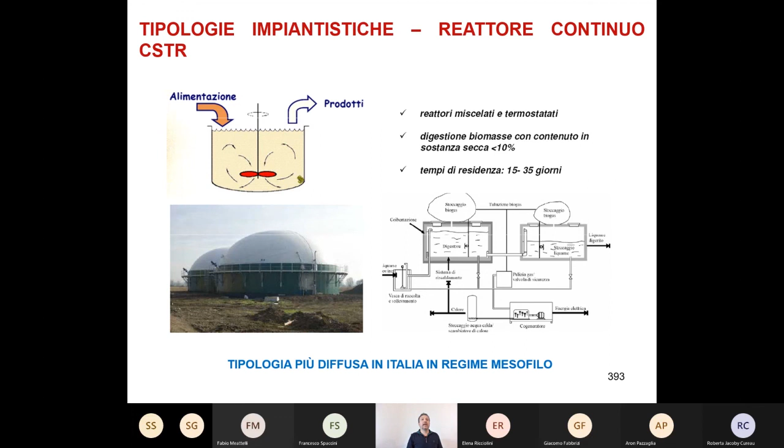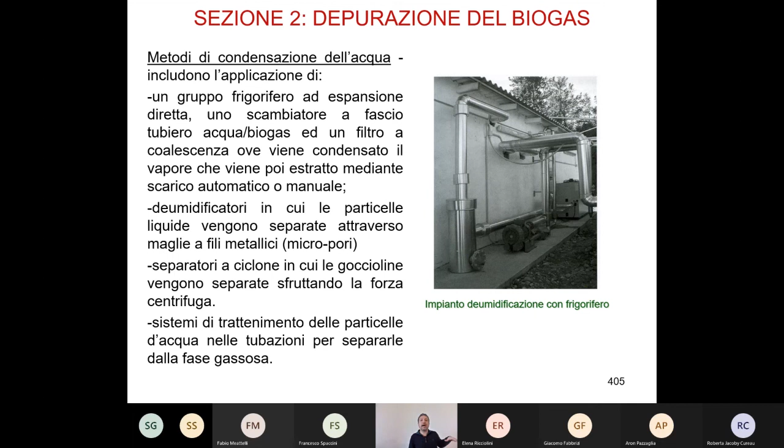Okay, I'll go very quickly because I've treated all the important things. If you want, you can find more detailed information, for example for biogas cleaning. If you use biogas in a turbine or an engine, you must clean it, because some components could be dangerous for the turbine or engine. You should separate methane and CO2, which isn't important for the reaction, from other pollutants dangerous for the energy system, like sulfur. Sulfur is very dangerous for the turbine because it can break it down. These are some systems that separate the pollutants, and finally the diesel engine or turbine for energy production.

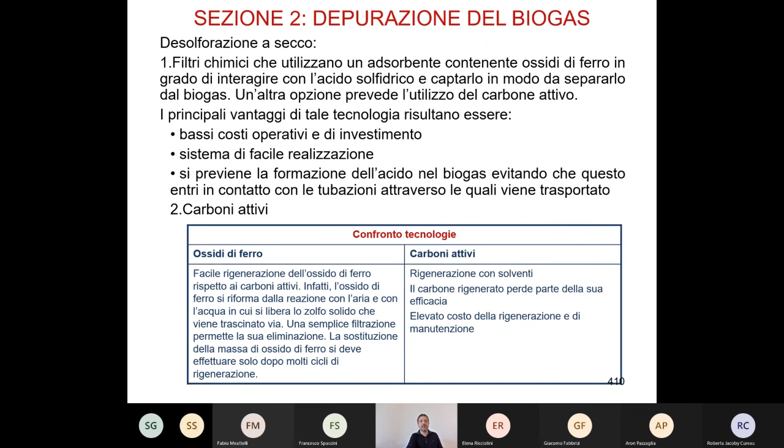So another way to use a gaseous biofuel. I would be happy if I transferred this interesting information. In general, liquid or gaseous biofuels are better than solid biofuels. Gasification or anaerobic digestion are used for this goal, to transform a solid biofuel into a gaseous biofuel that can be used in engines and turbines. You can't directly use a solid biomass or solid fuel in this kind of energy conversion system. So this is the reason for some of the thermochemical and biological processes you have seen in this presentation.

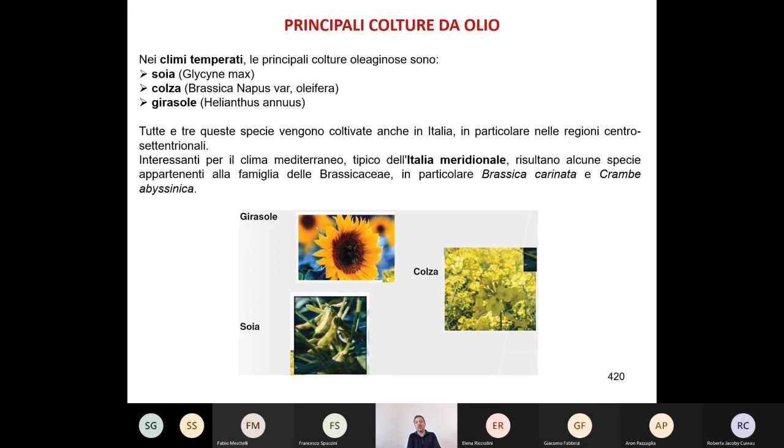Okay, I won't talk much about mechanical processes, because there isn't so much information to give. We can just say it's a physical process that allows milling of seeds to extract oil. So you can use, for example, sunflower or soybean seeds, recover them, and mill them to produce oil. You can use this oil directly in a diesel engine to produce electricity and heat.

Or, more interestingly, which we'll see in the next lesson on biofuels, you can use the oil in a chemical reaction called transesterification to produce biodiesel, which is very similar to diesel. We usually use it in our cars in a small fraction. If you see B7 at the distributors, it means there is up to 7% biodiesel in the diesel. But this will be the topic of the next lesson, where we discuss biofuels and bioproducts.